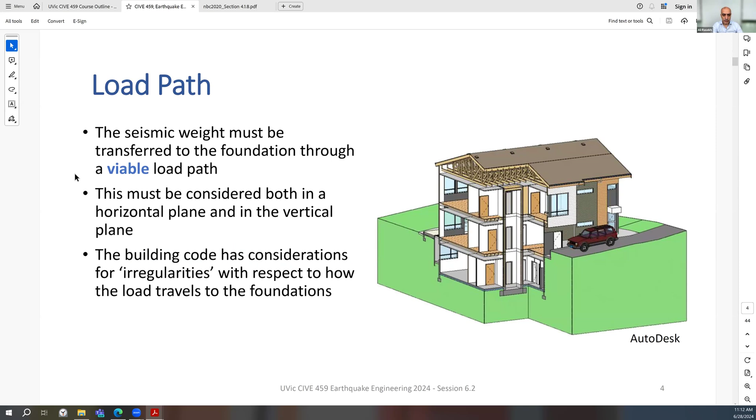We had this discussion that the code somehow emphasizes different load paths for vertical and horizontal, but practically in engineering, sometimes they are slightly mixed. So I interpret it as different capacities - don't use the same capacity you use for vertical for lateral. That's the way I would interpret it. If there is the same system, 50% of capacity is for vertical, 50% for lateral - they don't alternate, they add up to each other.

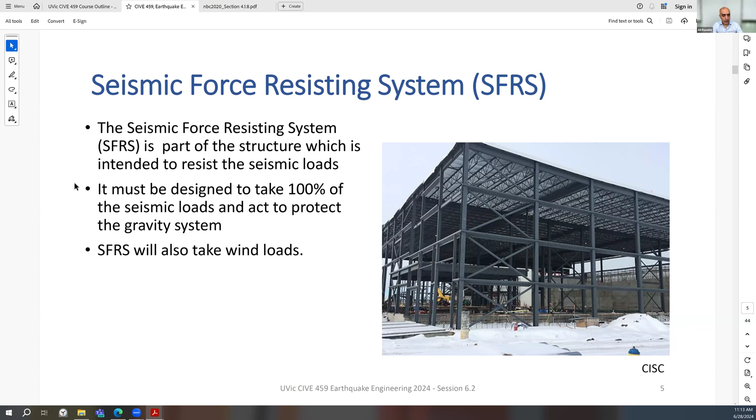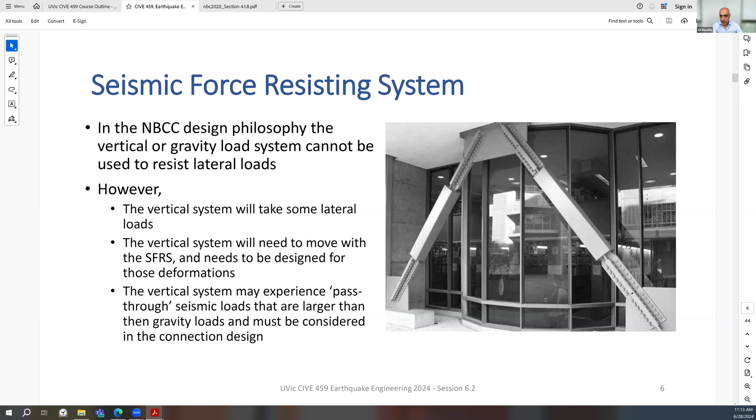A typical lateral load resisting system through bracing - this one looks more advanced, maybe there are dampers in here, in this covered area, or maybe it's concrete which prevents buckling. I cannot remember where I got this image from and didn't keep the caption, but it's a slightly more advanced bracing than usual.

Types of seismic force resisting systems as practiced in structural engineering: moment frames, which carry the lateral force because the connections are kind of rigid - they can transfer moment through the connections, therefore the name moment frame. Brace frame, where braces are used for lateral load resistance. They could also be mixed, like both moment resisting and bracing.

Shear wall - let me check the chat. Shear wall is where we use some sort of wall system to prevent lateral force, could be concrete shear wall or wooden sheets in smaller buildings, or steel. In practice I haven't seen steel used, but many other engineers are using it, so this wall could really be a steel sheet.

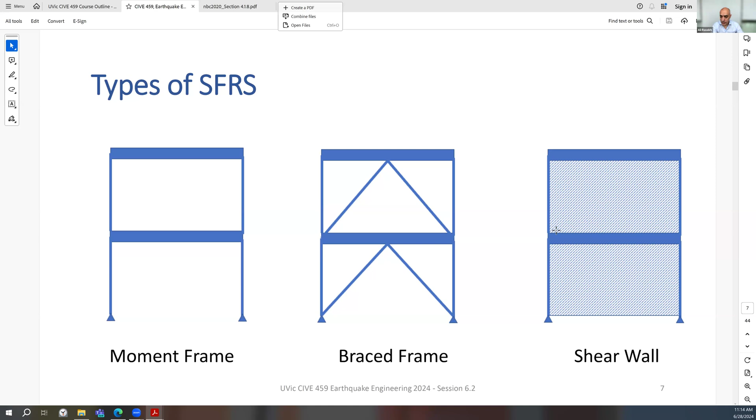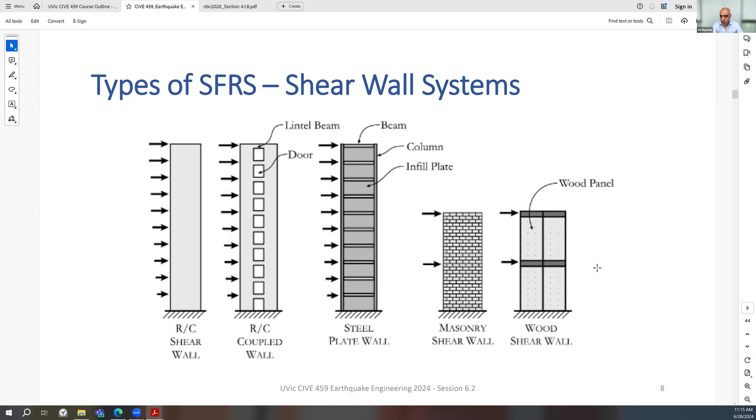Seismic force resisting system - what do we mean by shear wall, or coupled wall, or shear wall with opening? Steel plates could apparently be used in high rises as shear wall. Masonry shear wall is definitely used, and wood panels are definitely used.

Bracing frames, mostly in steel. Concentric, meaning that the two braces meet each other within the structure.

Eccentric, meaning that there is an eccentricity, they are away from each other, which creates shear energy dissipation, a good mechanism that causes a good amount of ductility.

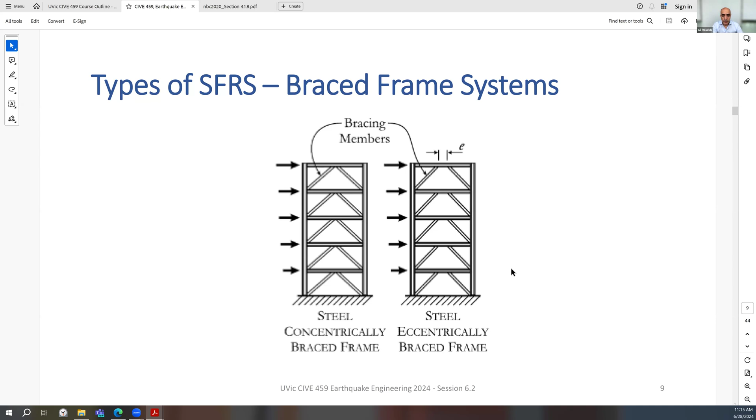Earthquake forces in shear wall systems. The shear wall, like the usual concrete shear wall, could also be some sort of duct around the elevator, or a coupled wall where there are lots of openings, creating a coupling system.

This means there is also transverse shear, with beams carrying lots of shear in the vertical direction, besides the normal shear wall having a lot of shear in the horizontal direction. In this system, even in the regular shear wall, the ends of the wall will be designed for huge tension and huge compression.

With steel plate shear walls, the steel plates transfer a lot of shear, and theoretically, steel is the best product to provide ductility, so I would say this system also provides a lot of ductility.

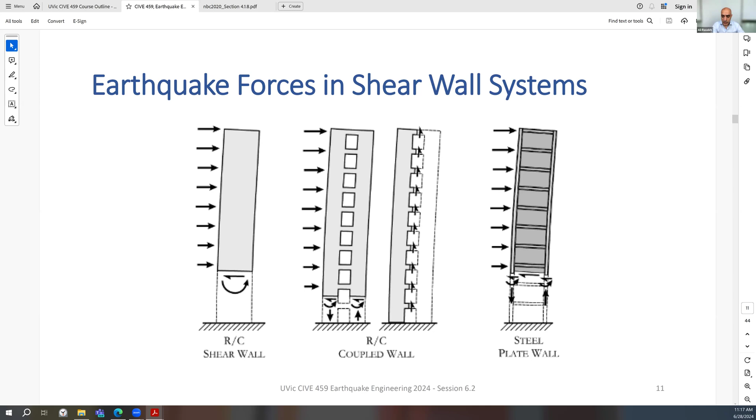And again, at the base, we have a lot of tension on one side and a lot of compression on the other side, which we should design for.

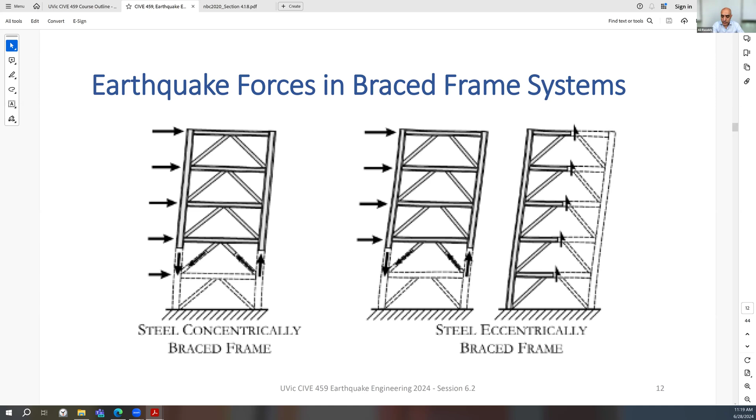Maybe if any brace is sheared out, we can basically cut it and replace it. So in terms of post-earthquake retrofit, this is also a good idea, besides the fact that it dissipates energy.

In moment resisting frames, as I said, we have a lot of moments in beams and columns, which will result in plastic hinges. Plasticity means dissipation of energy.

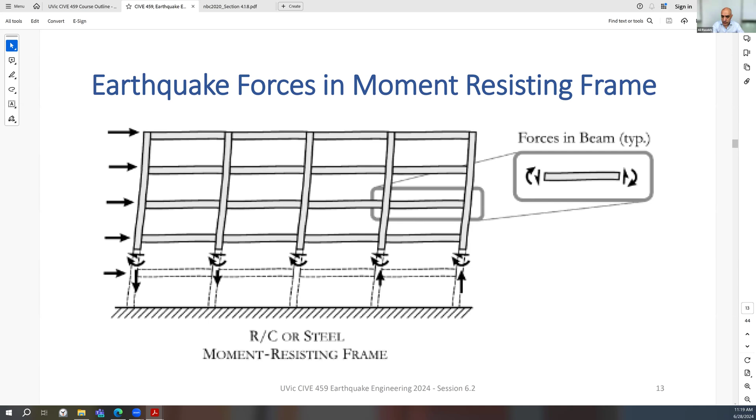Now, a recap of the equivalent static force procedure. Within the National Building Code of Canada, the way they think about it is a triangle - meaning the lateral forces increase with elevation - plus an additional portion which is added only to the roof.

This accounts for higher modes, meaning the deformation shape and the shape of the equivalent lateral force is not exactly triangular - it should be a little nonlinear, and the way NBCC accounts for this nonlinearity is through adding Ft.

Because we don't want to change the total force, we reduce Ft from the total force, then distribute it with weight functions through the height to create this triangle.

We apply that additional portion only to the roof, which is a portion of V, the total lateral force, or base shear - the shear at the base, which should add up to V. We calculate V using the equation, giving an estimate of base shear, the total shear at the base.

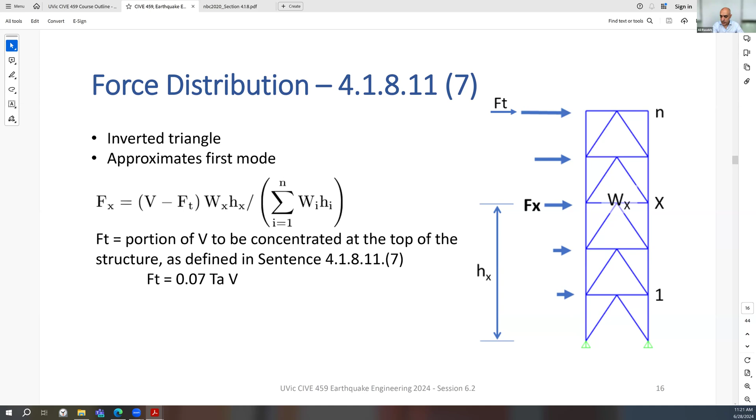Now talking about distribution through the height, meaning a system with more than one important mode, we can re-emphasize the effect of higher modes. In a way, we increase the base shear because of the higher mode effect, using parameters from the code.

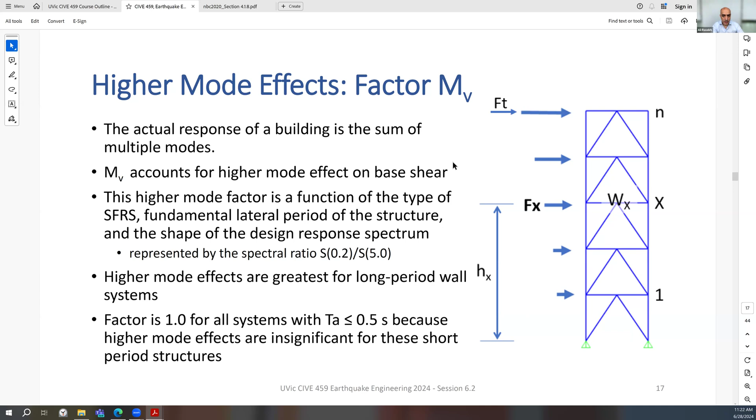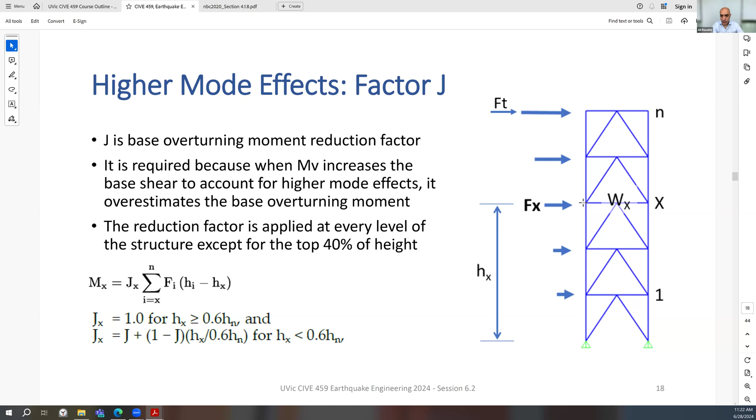But then we realize that we are overestimating the overturning force, so we reduce the overturning factor. This reduction is applied at every level of the structure except for the top 40% of the height. So we reduce it from base up to about the 3rd story out of 5, that's 60%. We reduce it between these 3 stories. These top 2 stories we don't reduce, we keep it higher because of the higher mode effects, we are more worried about the top of the structure.

And we show the table, the corresponding table is table 4.1.8.11, that has both factors. So MV for increasing base shear.

This looks like it's mostly applicable to wall and wall-frame systems. So mostly in wall-frame systems, we are accounting for higher modes. In a lot of other structures, say the first item which is moment resisting structure, it appears that no matter how tall the building is or what your period is, you don't really increase it. But then for walls, wherever walls are included, for longer periods and for taller buildings, we increase the base shear because the higher mode effects are apparently important.

On the other hand, the reduction factor that we use for overturning checks looks like it's usually important for taller buildings and for higher modes of the structure, and for structures with longer period. So for longer periods and for tall buildings, we have a serious amount of reduction to account for higher modes. That's the effect of higher modes, and we are allowed to reduce the overturning moment.

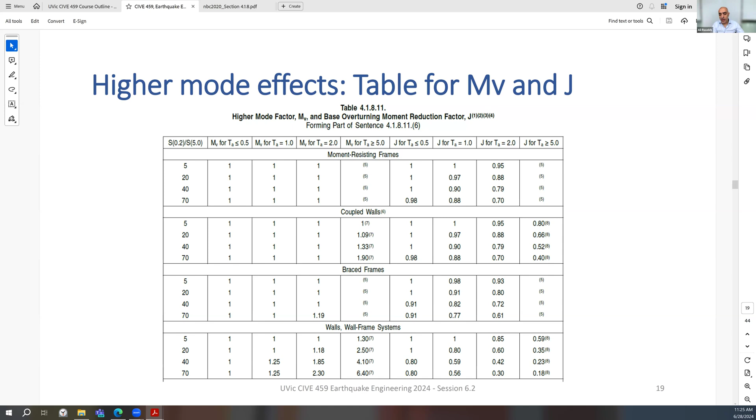Again, this is more pronounced for walls. It looks like this is a little counterintuitive, since you'd think walls are rigid and therefore primarily acting in their first mode. But it looks like for walls, the effect of higher modes is even more important than for a steel building. They have done lots of calculations and tests and provided us with a simple to use table.

Now, this solution that was provided last time, and reviewed again this time, cannot always be used, and we need a factor called regularity, which we will discuss shortly. The code allows for this simplified solution only in seismic category 1 and seismic category 2. We will soon review what seismic category 1 and 2 mean. They should meet any of the following criteria, so there's an 'or' between them: seismic category SC1 or SC2. Any building in these two seismic categories means a smaller risk, so because we are taking a smaller risk, we can use the simplified solution.

Or a structure which is regular, like for seismic category 3 and 4 - a structure should be regular, less than 60 meters, and the primary period should be less than 2 seconds, say a 20-story building, about that value. And if your structure is irregular, and if you are in seismic category 3 and 4, then you come to this case, limited to certain types of irregularity. Looks like number 1 and number 7 are excluded. Besides, it's very limited in height, like only 20 meters, and limited in primary period. So that's what we'll explain further.

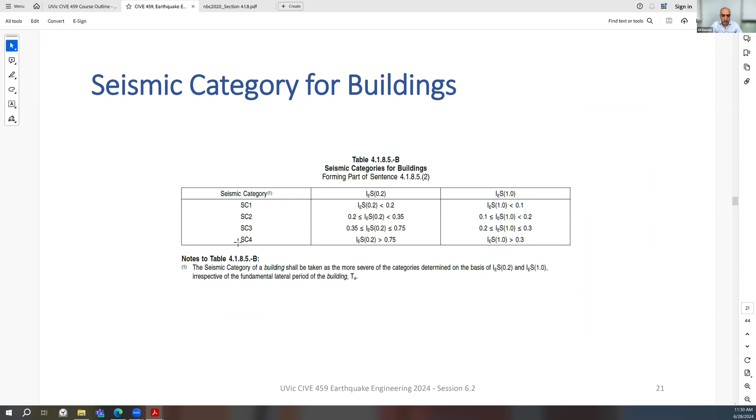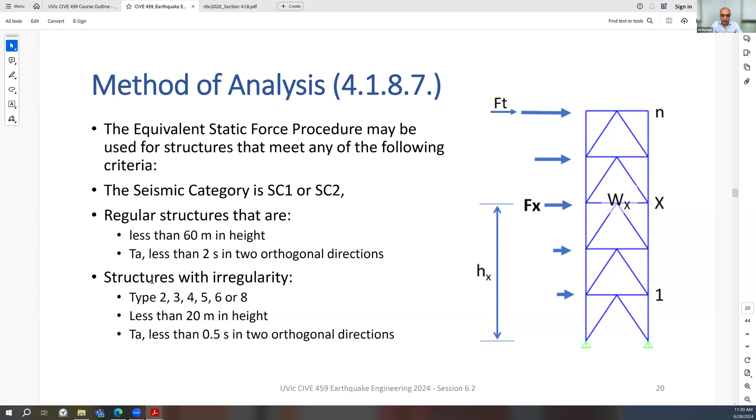So we are discussing seismic categories. If you are between these two seismic categories, you can use the simplified method with no limitations. If you are in these two seismic categories, higher risk - seismic category 3 and 4 with larger accelerations - then there are limitations. We should figure out if our structure is regular or not regular, and for each one there are certain limitations.

Now let's figure out regularity. By regularity, we mean that the structure doesn't change in plan and in elevation. The changes that are important to us are stiffness, strength, weight, geometry or shape, and torsional effect. The structure might appear to have uniform geometry, but because of certain design, maybe the center of rigidity and center of mass are not located at the same location. That causes torsion, which will cause a structure to be considered irregular.

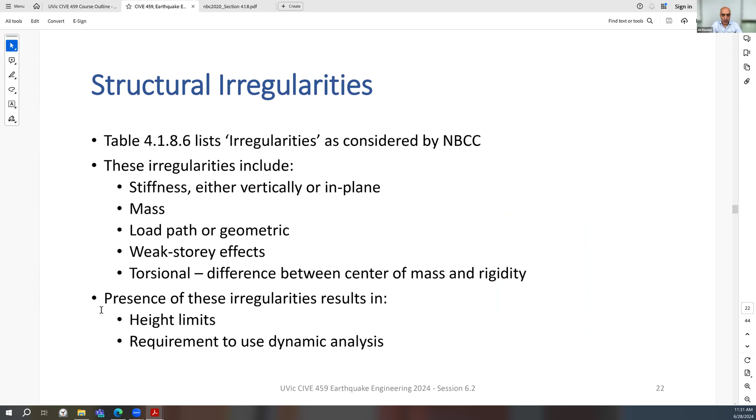The presence of these irregularities results in height limits. And if we don't meet the height limits, if the code prohibits using simplified static analysis, then we have no choice but to use dynamic analysis. But the good news is that you already know how to use dynamic analysis, so you can proceed with your SAP 2000 or similar program.

An extensive list of different types of irregularities, structural irregularities in a building.

Type number 1, which appeared to be a very important one, is vertical stiffness irregularity. If you remember, we said that type 1 was one of the critical ones, which totally prohibited using the simple method in seismic category 3 and 4. Let's see what it is.

Vertical stiffness irregularity: for concrete and masonry shear walls, vertical stiffness irregularity shall be considered to exist where the lateral stiffness of the SFRS in any story is less than 70% of the adjacent story, or less than 80% of the average stiffnesses in the 3 stories above or below.

So basically it's about sudden change in story stiffness, because say we cannot use braces in a certain floor due to client requirements. Braces provide good stiffness, so instead maybe you use a moment resisting frame in that story, which is very good for the ductility.

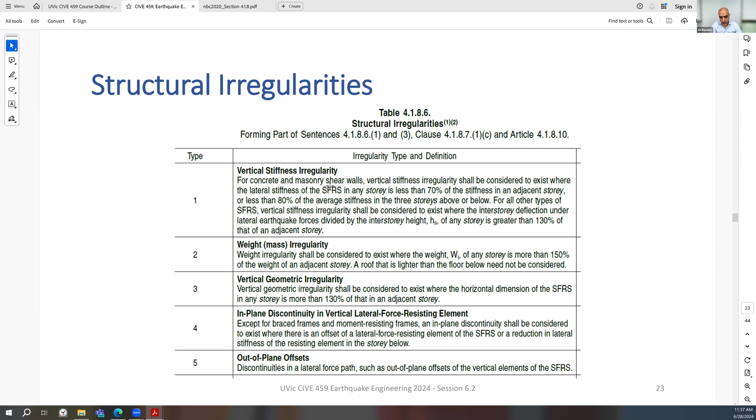Vertical mass or weight, I don't know if the code emphasizes it or not, but some of these rules are softer when applied to the roof level. The code is not as much concerned about the roof level. This may be a summary, because in ASCE it repeatedly says this doesn't apply to the roof level, so that's general engineering judgment, we are not as concerned with a major change at roof level as in mid levels.

Weight irregularity is more about suddenly having a heavy level. Maybe here it's a taller level where more equipment can sit, which caused it to be heavier.

Vertical geometric irregularity: remember that by geometry we mean the geometry of the seismic force resisting system. So the geometry of the seismic force resisting system has suddenly reduced from 3 bays to 1 bay, or the geometry of the system, which appears to be a moment frame, changed suddenly from 4 bays to 2 bays.

So this one is an in-plane discontinuity in vertical seismic force resisting system. That's within the plane of the seismic force resisting system, but then suddenly the resistance from this panel jumps into this panel. So the load path, thinking about load path, has come down up to here, but it should suddenly transfer to the other side of the building. Or this one was a full panel and suddenly they required an opening here, and therefore the stiffness changed.

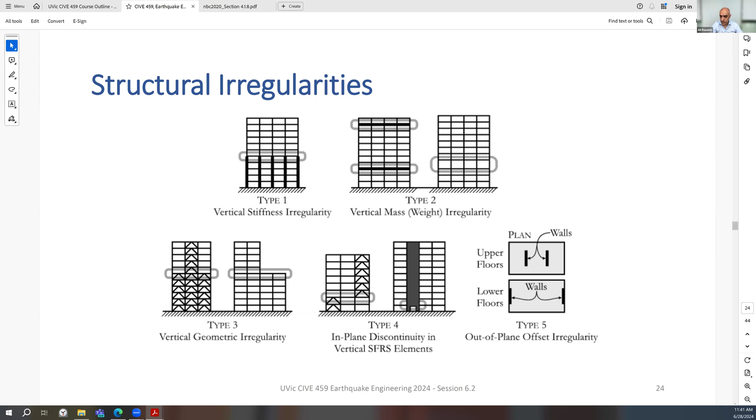Five more irregularities to go through. Discontinuity in capacity. As I said, both stiffness and capacity are important. We discussed the issue with stiffness, but this is about capacity, strength. So we cannot have this, or we can have it, but we need more analysis.

That irregularity is when there is a weak story, one in which the shear strength of that story is less than that of the story above. So it's like a reverse order - when you go higher you have higher capacity, and that will cause issues. The story shear strength is the total strength of the seismic resisting elements, so it doesn't give you a percentage, but it's more descriptive rather than percentage-based. That's when you suddenly go from a weaker story to a stronger story.

Torsional sensitivity - torsional sensitivity should be checked, and there are equations for that. It's more about having a building where the center of mass and the center of stiffness are not the same.

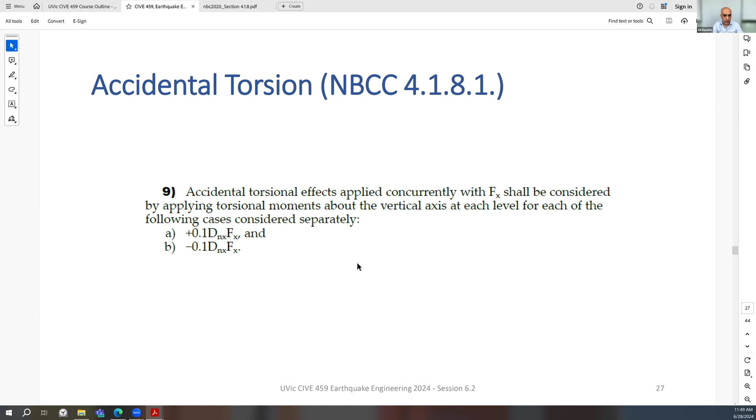But the way I understand, NBCC says always check additional eccentricity, always use accidental eccentricity or torsion. But ASCE gives a measure comparing these two values and makes a decision whether you need additional eccentricity or not. But if it's me, if I'm the engineer, I always do that, because we are not exact in locating the center of the mass.

It's like a sensitivity check in a way that we always do for any design, to see if our design is sensitive in... sorry, I'm going back and forth too much. I mean, we always do sensitivity checks to certain issues, and in this case, we should see if our design is sensitive to location of center of mass.

If the design changes by a lot if we have wrongly estimated the location of center of mass, the code gives us a guideline: just change the center of mass location by 10% of this dimension and check your structure, do an additional check on your structure. That's pretty much what the code is telling us.

Period values. So we all know the general concept about the period and how we can read periods from a modal analysis. However, the code also gives us a simplified solution based on the height of the structure -- different equations for different types of structure, based on experience that they have.

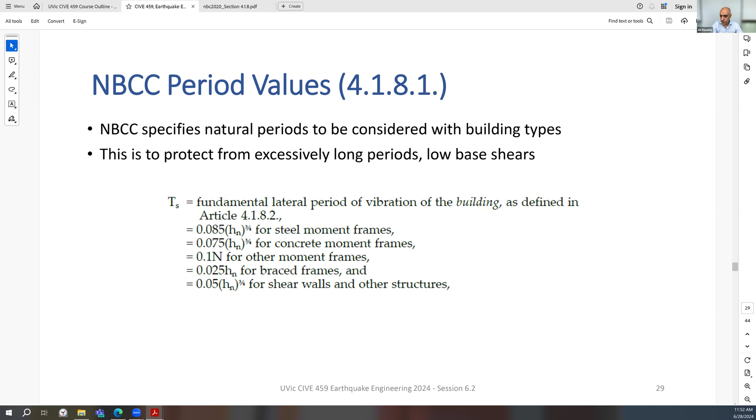But any structural engineer, I would say, should at least memorize this one: for your typical building, the number of stories divided by 10 -- that's a very quick, although slightly imperfect, quick estimate of the period of your structure. For building a structure, that's what I mean.

Now the story drift: lateral deflections obtained from a linear elastic analysis and incorporating the effect of torsion, including accidental torsion, should be multiplied by this factor. So remember that when we were discussing the ductility issues, we always said that most of the time we assume that the deflection without the effect of ductility was already correct, but the forces were overestimated. So the reduction factors, or as the code calls them, modification factors, are intended for force estimate, not for deflection estimate.

But when you are going through your steps, you create a model and then you apply the forces which are reduced to that model. And then you read forces which are useful, but then you also read deflection, which are now underestimated.

You should reverse that order and multiply your deflections by those reduction factors. When you go through the whole procedure and create a model for lateral deflection, those deflections are underestimated, so reverse it and increase them by modification factors. For the importance factor, we apply it because we want to slightly over-design important structures, but that causes a wrong deflection estimate, so we divide it by the importance factor. That's basically the philosophy: for reduction factors, modification factors, and importance factor, we reverse the operation when reading the deflections.

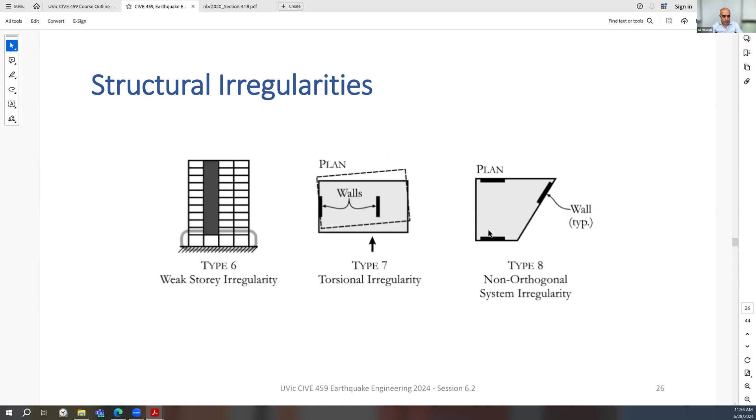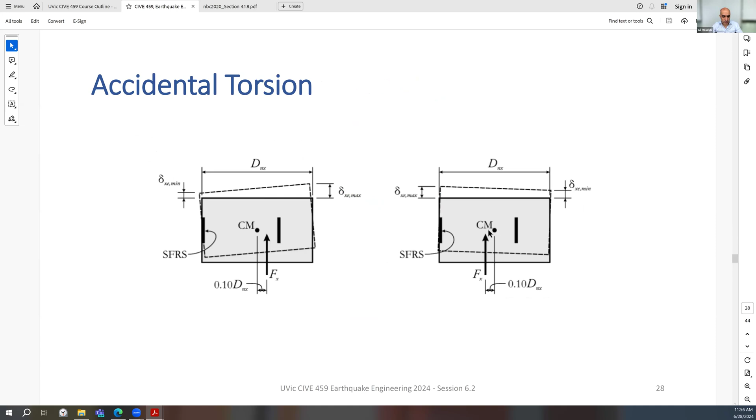For buildings with a type 9 irregularity, where importance factor I sub E multiplied by S is equal to or greater than 0.5, deflections should be increased by 20%. Let's remind ourselves what type 9 was: that's gravity irregularity, where eccentricities cause additional deflections. So increase your program's deflection estimate by 20%, because gravity may be causing a P-delta effect combined with lateral earthquake force pushing the structure sideways, resulting in more deflection. The code says, to be safe, increase it by 20%.

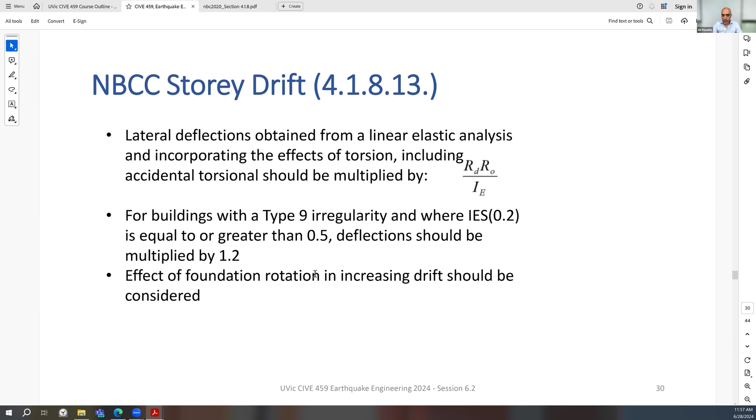Effect of foundation rotation in increasing drift should be considered. Maybe the foundation lifts off—in your SAP2000 model you tie the location of the foundation, but in reality the foundation may lift off during the earthquake. Account for that in your estimate or modeling, because that will also contribute to the deflection.

The limits of story drift for very important buildings: we have the highest limitation, 1% of the height. For buildings of high importance, 2% of the height, and for buildings of normal importance, 2.5% of the height. So 1%, 2%, and 2.5%.

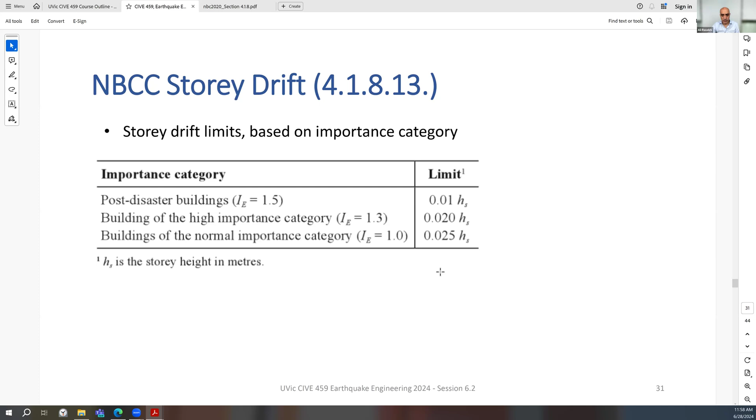However, the golden number structural engineers always remember is 1%. Generally we think about not having a deflection greater than 1% of the height, but practically the code allows for more. At least for my generation of structural engineers, the first number we think about is 1%. But sometimes it could be more stringent, and per code for regular structures of regular importance, even up to 2.5% is allowed. That's also an important issue to design for, in terms of operability, serviceability, and comfort.

For structural separations, sometimes we need to be more stringent because if two buildings are built closely—two high rises very close to each other—we need an even more stringent limit, because we don't want those structures to hit each other.

We use the square root idea. The idea is that if two buildings are moving towards each other they may hit, but it's less probable during an earthquake—maybe they move in the same direction, or in random directions. So we can relax it slightly and apply the separation using a square root: instead of the sum of the movements, we use the square root of the sum of the squares, which gives a smaller value. The code made it slightly less stringent because there's no coordination, especially no reverse coordination—we cannot imagine a scenario where one building moves in one direction and the neighboring building moves exactly opposite and they hit each other. Therefore the code made it slightly easier, based on engineering judgment.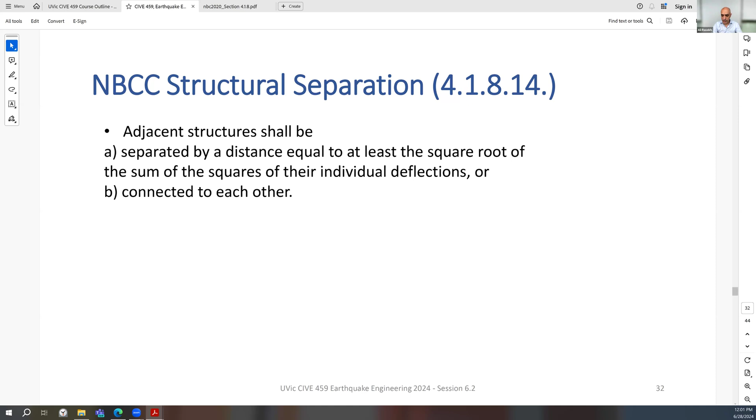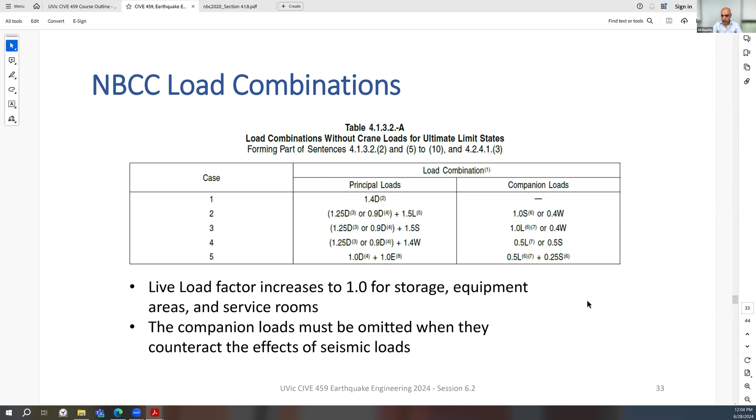So that's your typical scenarios of load combinations, or some of the important ones. Number 5 appears to be the only one which is earthquake related, so related to our course. And again, good engineering judgment is that don't use companion loads if they are helping. Only use them when they are increasing the demand. Moving on, modern design philosophy.

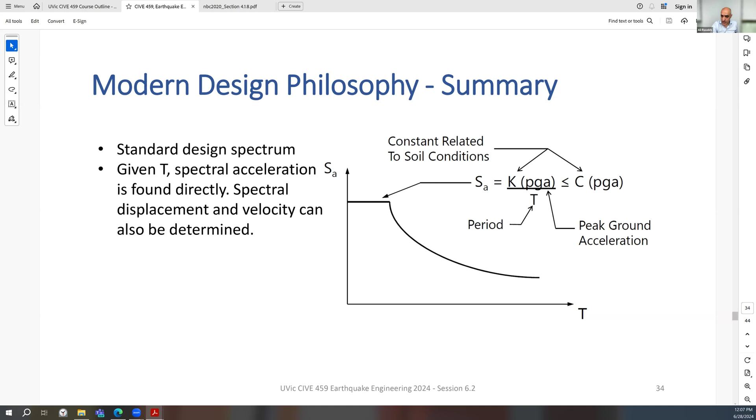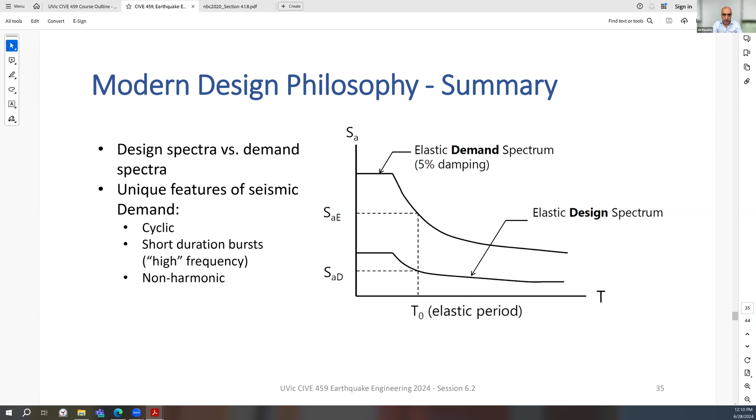Unique features of seismic demand: it is cyclic, increasing and reducing within about a minute, with some short duration bursts in a very small time reaching its highest shock. It's not harmonic, so not exactly sinusoidal, although it's cyclic, like increases and reduces, but not exactly harmonic. That's the general characteristics, and that was the idea that resulted in the philosophy of earthquake design.

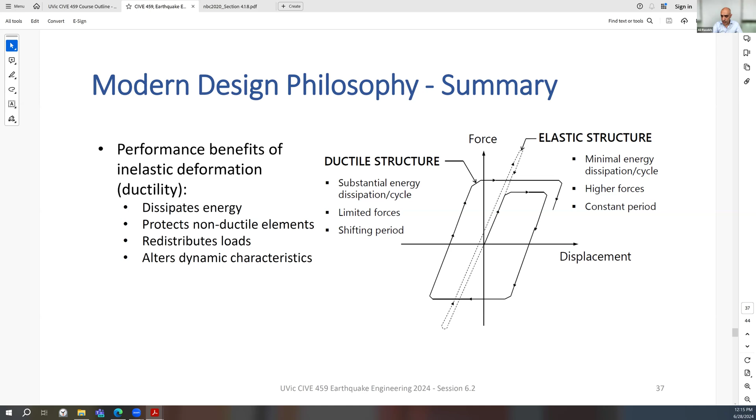While if we had remained elastic - the dark borderline is the real ductile structure that we have - however, if the structure had remained elastic, energy dissipation was minimal, and the forces would have been larger as well. So there's a disadvantage right there.

The inelastic deformation alters dynamic characteristics, and period shift could be beneficial. That's part of the knowledge of the structural engineer: if the initial estimate of period was T0, and because the structure has softened, the period increased slightly or even more, the response decreases.

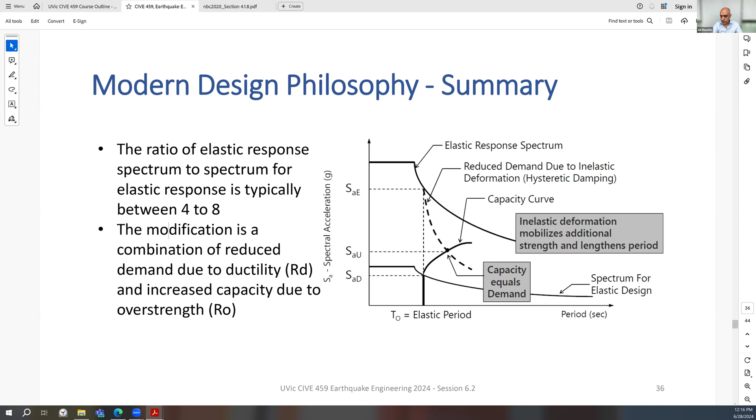Then we can go to any typical design spectrum. If our estimate of period increases, the demand reduces, here as well. So that should also be built into your earthquake engineer judgment.

In real life, the load path starts from the top frame where the inertial mass, most of the weight, is. The inertial load really starts there and goes through the diaphragm and its connection to the frame, then comes down to the steel frame, or steel bracing, where we want ductility to happen and we want the weak link to be the frame.

That's the concept behind capacity protection. Any other member should be stronger than the frame so that the damage happens in the frame, because we designed the frame for that purpose. We don't want damage in the diaphragm above, and we don't want damage in the connection to foundation or the foundation itself. We want everything to happen in those braces.